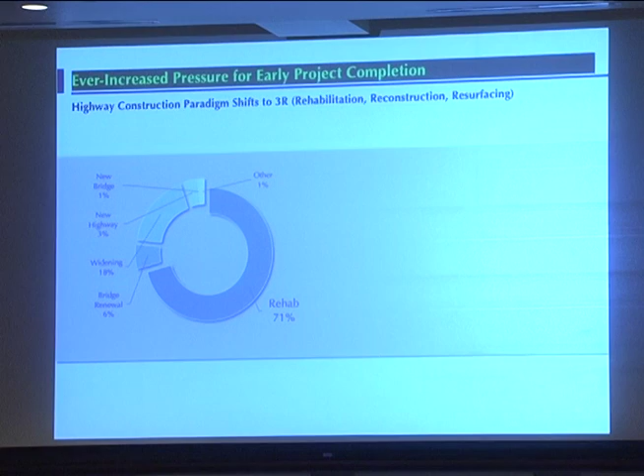For my research purpose, I collected and analyzed a fairly large set of high confidence project data, over 6,000 projects from Florida. For the initial data analysis, I carefully classified all 6,000 project data by type of project. 71% of all the 6,000 project data fit into rehab projects, the 3R category: rehab, reconstruction, and resurfacing. New highways and new bridges take only 4%.

Data do not lie. So based on this data analysis, we can conclude the current highway construction paradigm has changed from building new highways and new facilities to 3R: rehabilitating, reconstructing, and resurfacing existing facilities. But however, the main problem is...

30% of such rehab projects are in urban areas like Dallas, Houston, Austin, San Antonio. If you look at what's happening in California, 70% of such 3R projects are located in the heavily populated San Francisco Bay Area and LA metropolitan areas.

This has created urgent dual challenges for us: we've got to close the lane to rebuild aging infrastructure, but at the same time we've got to think about a way to minimize public inconvenience from traffic delays caused by lane closures. So there has been increased pressure to finish the project as early as possible to beat the clock. A+B with incentive/disincentive provisions is one of the ideas to achieve this aim of early project completion.

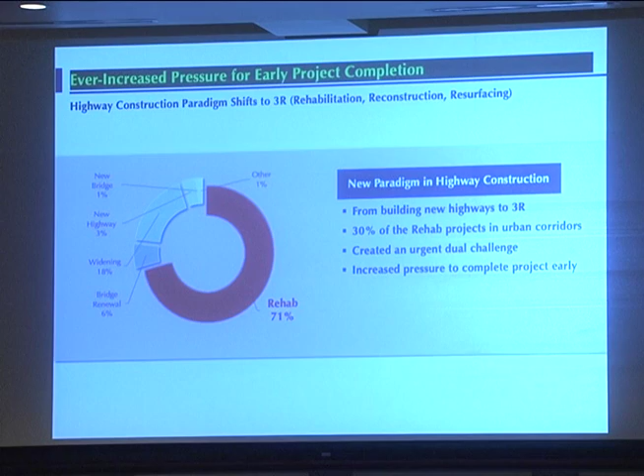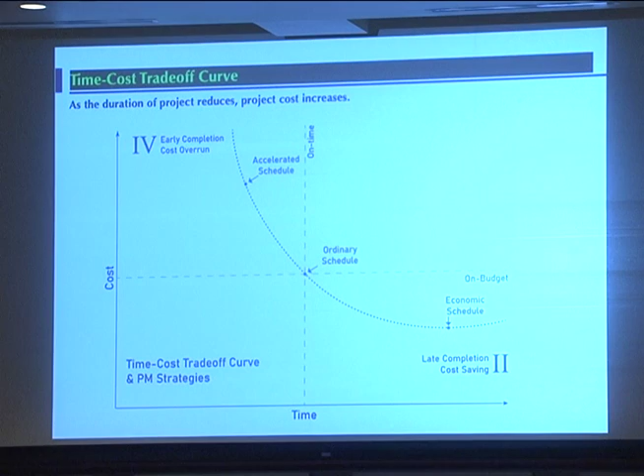So there is a trade-off effect between project schedule and project cost. Based on this time-cost trade-off curve, let me get your attention to the red dot right here at the center point. These are our goal, the goal for any project to achieve on-time and on-budget project delivery. Our goal is moving the curve from here to the bottom left corner, this is our ultimate goal.

Based on this center point, the red dot, we can divide the entire area into 4 different performance blocks. The first performance block is any project that finished behind schedule and over cost, with cost overrun. By the same token, the second block is late completion with cost saving. This first performance block is the worst case scenario. If you look at performance block number 3, this is the best case scenario, which means any project in this block finished ahead of schedule with cost saving, the best case scenario.

So I selected 1,400 projects that utilize alternative contracting methods, just like A+B, incentive/disincentive, no excuse bonus, lump sum, and design-bid-build. By utilizing the key performance indicator I developed, I carefully tracked the individual performance of these 1,400 projects. As you see here for A+B, can you match the color? There is a heavy population for A+B. If you look at the green, which represents the ID projects, most of them are heavily spotted in performance block number 3. So let me give you a number.

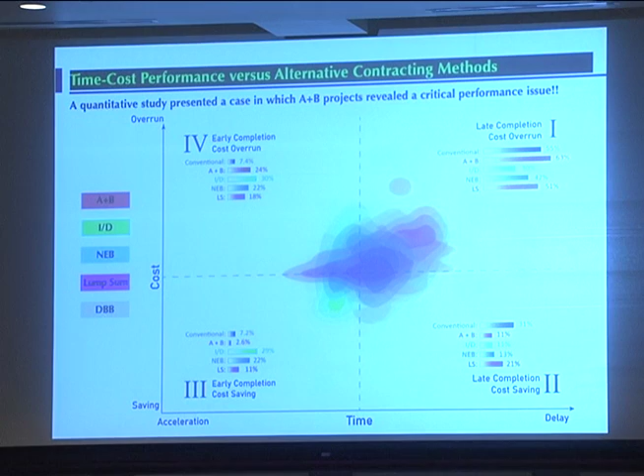Let's look at this. As you know very well, A+B project is commonly used together with ID provisions. For Florida, 100% of A+B projects are used together with ID provisions. It's very common. In this A+B ID contracting, the bidding mechanism, the winning bidder is the one who turns in the lowest combined bid for the A cost and B for the time.

That's why the determination of contract time, the user delay cost, which is the B value of A+B, is extremely important. Let me show you some worst practice example.

Let's look at this. This is a part of the Interstate 580, which is called the MacArthur Maze. This is the East Bay, home of 7 million people. This is one of the major commuting routes heading to the Bay Bridge to San Francisco.

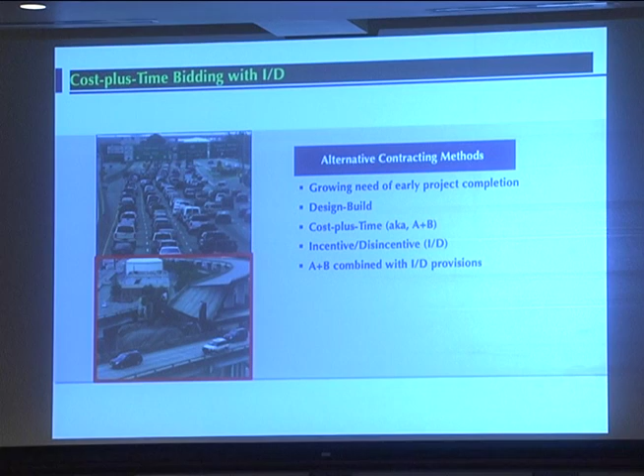Let me tell you more about this project. A truck driver, look at this, around 4 o'clock a.m., the truck driver just fell asleep. Then he lost control. A fully loaded gasoline tank truck turned over. Because of the fire, this small portion of an important bridge just collapsed.

So what does that mean? 7 million people living in the East Bay Area, including myself. Around that time, I lived in that area, just 5 miles away from this bridge, for my PhD study. The bridge collapsed, so 7 million people had an immediate strong impact. For that reason, this project got extremely high attention from the media, the traveling public, and the government.

For that reason, Caltrans decided to use the A+B ID bidding mechanism. For the B portion, Caltrans estimated 50 days with a record-breaking daily incentive amount of $200,000 each day, with $5 million as the maximum incentive bonus.

The winning bidder was less than $1 million. In the end, the contractor was able to finish the entire project within 25 days, and of course he got the maximum incentive dollar amount of $5 million.

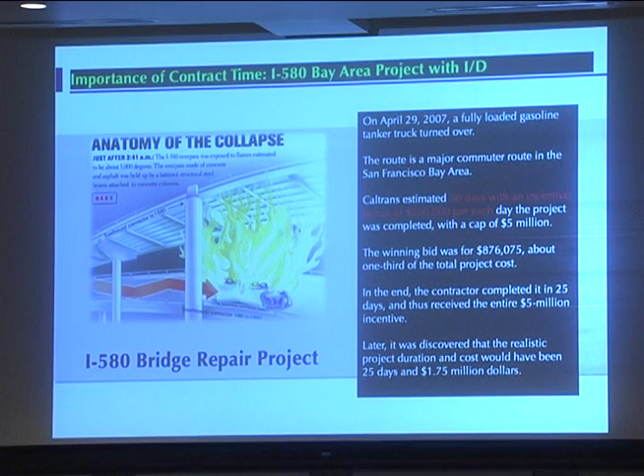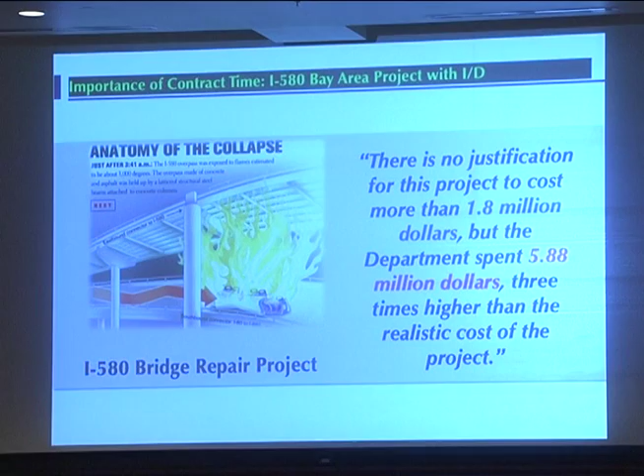Here's the conclusion from this project. There is no justification for this project to cost more than $1.8 million, but the agency spent $5.88 million, 3 times higher than the realistic cost of the project. This was a worst practice. The example clearly demonstrates the importance of contract time determination and user delay cost determination.

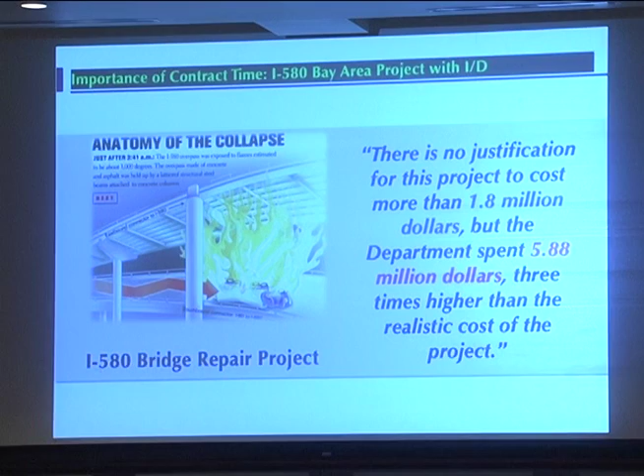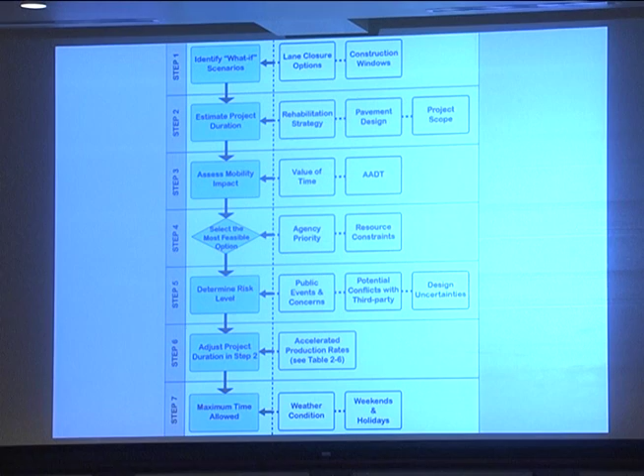Learning from this worst practice example, I have developed a 7-step procedure, which looks like this, to come up with the most realistic contract times and user delay cost for A+B projects. I was lucky to apply this new concept to 5 different Texas urban A+B ID projects.

In the next slide, we're going to briefly go over each of the steps, just briefly, because time is limited to 20 minutes. This 7-step procedure begins with the identification of potential what-if scenarios.

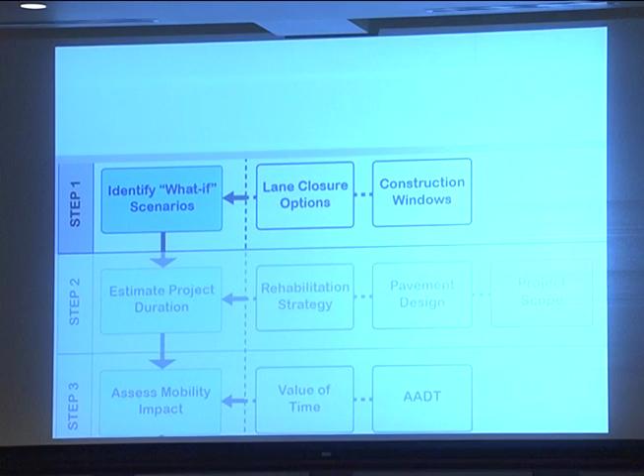The options can be defined with respect to duration and occurrence, such as nighttime, weekday, weekend, and 24/7. Each option can be planned under 3 standard traffic control options, such as single lane closure, double lane closure, and full lane closure, with some variations.

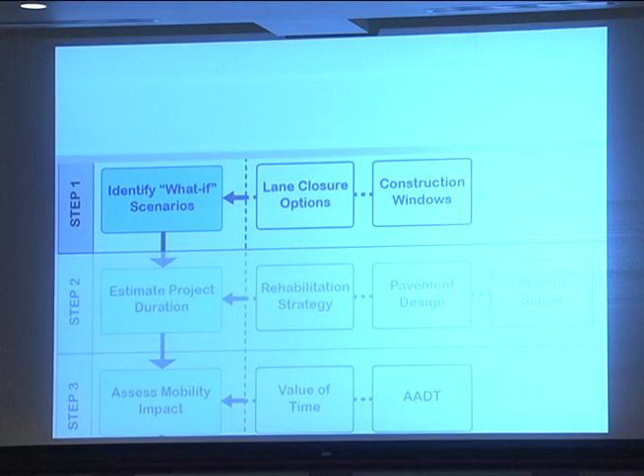The second step is about PDE, project duration estimate. The effect each individual what-if scenario has on project duration is estimated in this step by considering rehab strategies, pavement cross-section design. For example, for rigid pavement, it could be an 8-inch traditional conventional pavement cross-section design, or a long-lasting pavement design, 12 inches on top of an 8-inch cement treated base, and project scope.

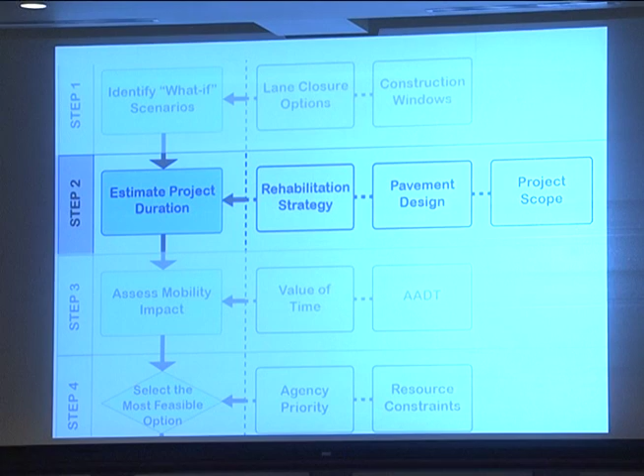Then step number 3: in this step we need to assess and evaluate the work zone traffic delay impact by considering various factors, such as value of traveler's time - $22 for passenger vehicles, about $37 for trucks, according to the 2015 TTI report. Then 24-hour traffic count, AADT from the Texas Lone Star database, and traffic lane configuration during lane closures, capacity adjustment based on the Highway Capacity Manual, the length of closure, lane width, number of lanes, percentage of trucks, etc.

At this point, we are getting 3 important decision-making data points: project schedule, user delay cost, and traffic delay.

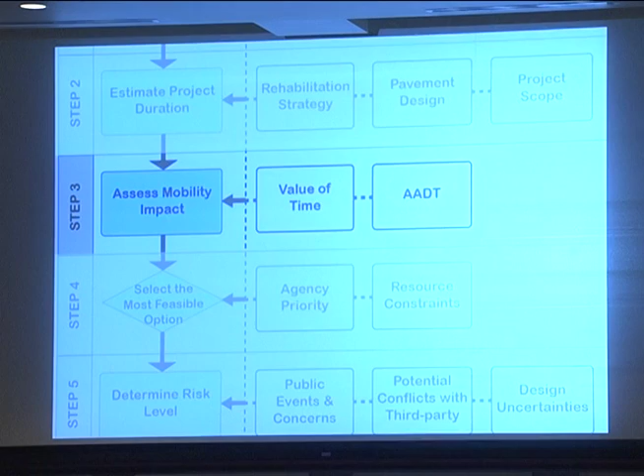Next, step number 4 is to select the most feasible option out of the 3 or 5 options, mainly based on the contracting agency's priority. If the agency's top priority is to beat the clock and focus on schedule and project duration, select the fastest option. If the agency wants to strike a balance between project duration, user delay cost, and level of traffic inconvenience to the traveling public, select the one accordingly.

Then for the selected final option, check all the potential risks, such as public events. Will there be a football game, for example, around September? Are there any public concerns? Also check any potential conflicts, such as right of way or utilities.

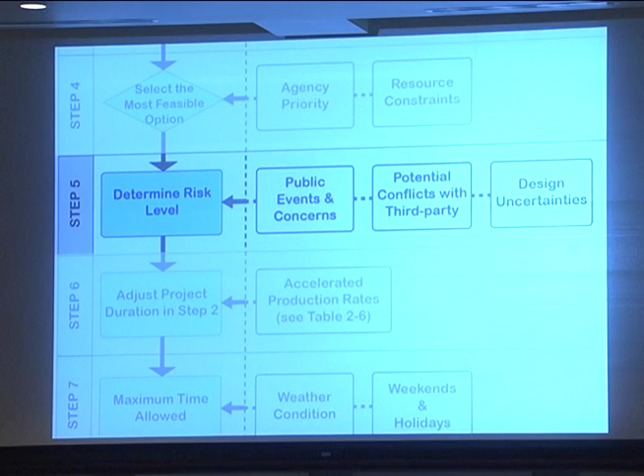Then step number 6, we probably need to adjust the initially estimated duration of the project for the finally selected candidate by applying accelerated production rate. So it is quite reasonable to expect that for A+B incentive projects, the contractor needs to make additional commitment, using 15 to 20% more resources for construction acceleration. This is, I believe, a quite reasonable expectation.

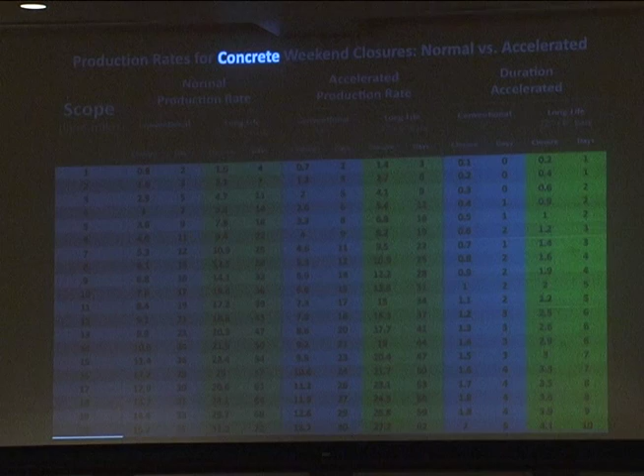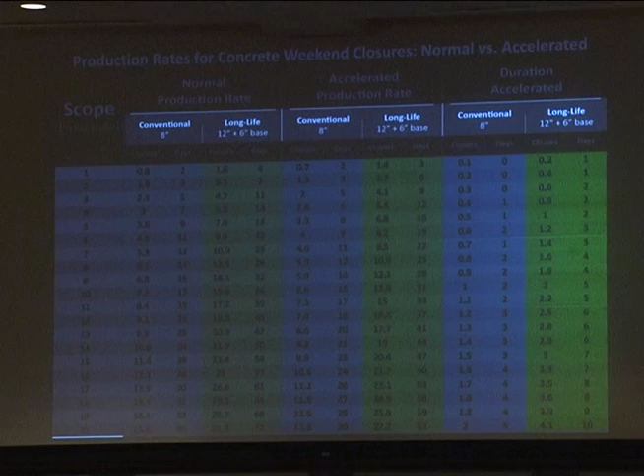When I developed these lookup tables for the accelerated production rate, I considered all the important factors, such as the type of rehab strategies - it may be concrete, hot mix asphalt, milling and AC, operator mobilization, and so on. Then the scope of the project, pavement design, then the duration and occurrence of lane closures - it may be weekend, weekday, 24/7, or nighttime. Then production rate.

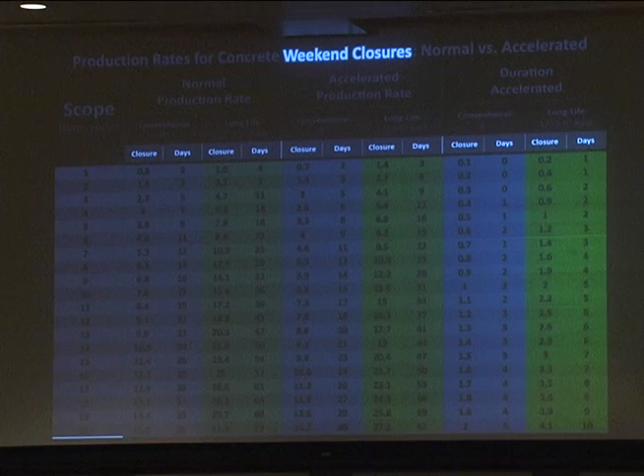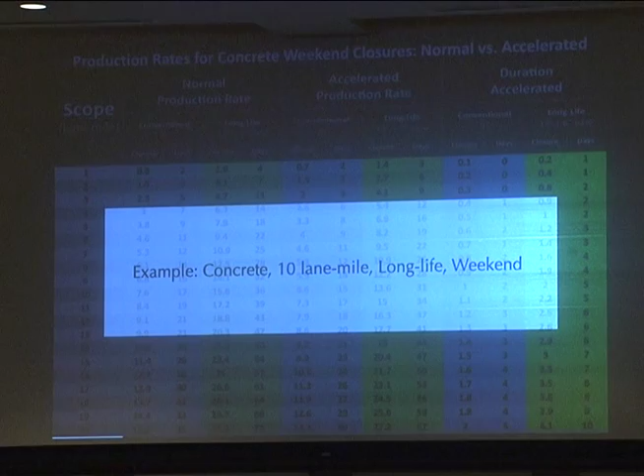So for example, let me give you an example. We're going to use the concrete CRCP rehab strategy to rebuild 10 lane miles of badly damaged highway using a long life cross-section design during a 55-hour weekend. For the concrete, select the concrete, then the scope of the project, then the pavement design - we're going to use a long life pavement design. Then weekend closure, select the table.

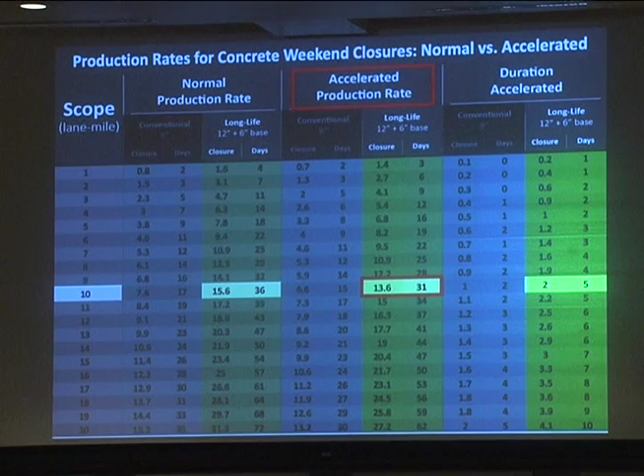Under the normal production rate, the table says it will take about 15.6 times of lane closures, needing 36 working days. After applying the accelerated production rate, the project can be finished within 13.6 lane times of lane closures, within 31 working days. So these are the savings.

Okay, so the last step is to convert the number of working days into the number of calendar days, considering the weather, weekends, holidays, and any non-working days using the Texas spec manual.

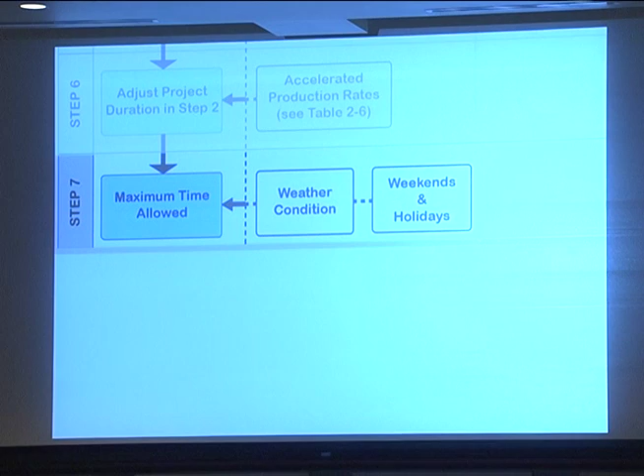As I said, I was lucky to apply this new concept, the 7-step CTD contract time determination procedure, to 5 different TxDOT projects. I just picked this project as a best practice example: the IH-20 Dallas project. The project scope is 6 centerline miles with 3 lanes for both directions.

So 6 times 3 is 18, 18 times 2 is 36 - that is the project scope, full-depth, 13-inch CPCD. Then the work zone has about 55,000 AADT. One unique thing about this project is the work zone has a very, very high truck percentage - 27%.

Then the agency wants to use A+B+I/D. The agency set up $4,000 as the daily incentive/disincentive bonus amount for 270 days. So the agency's estimate is 207... 270 days.

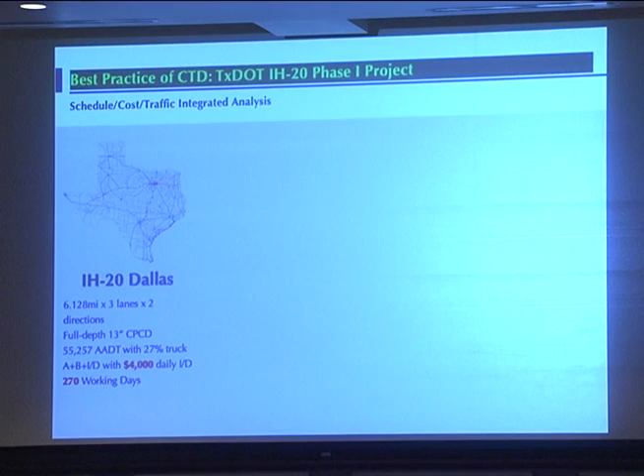Okay, then step number 1: in a pre-construction meeting, I asked the project team, 'What do you want to explore?' They said, 'We want to explore these 2 things: weekday and nighttime.'

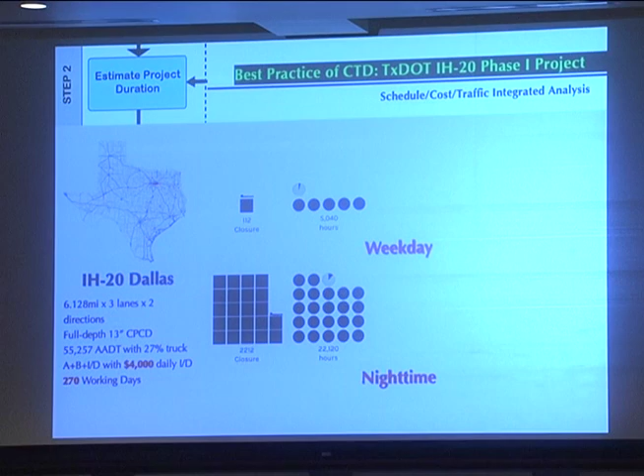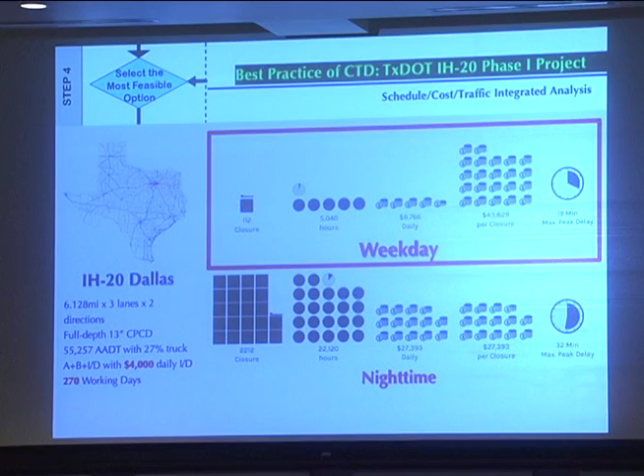Then step number 4, we checked all the potential options and selected the weekday as the final candidate. It was a very easy decision because weekday just stood out in all 3 evaluation criteria.

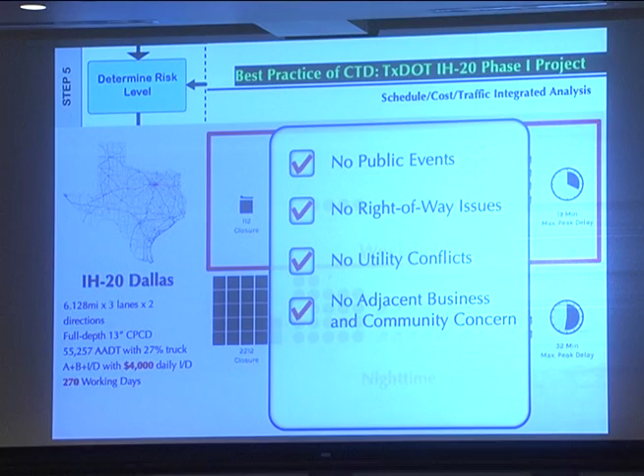Then step number 5, we checked all the potential risks. We adjusted the duration by applying the production rate lookup tables.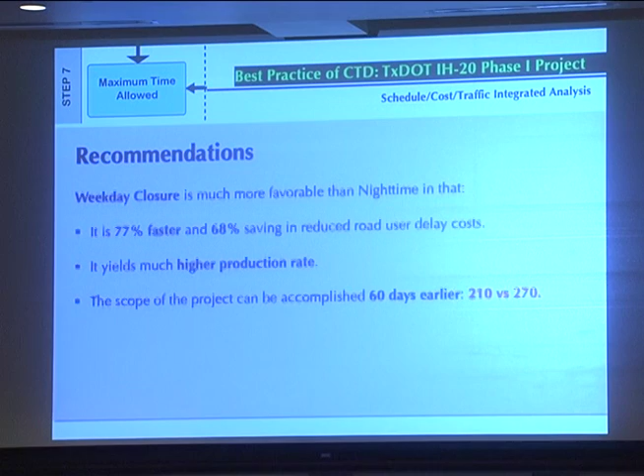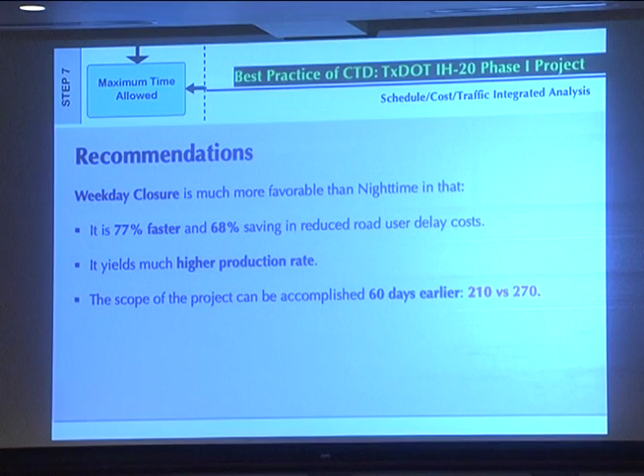Here are our recommendations for the contracting agency: we believe the 270-day estimate by the contracting agency is an overestimate, so we recommend 210 days instead of 270 days.

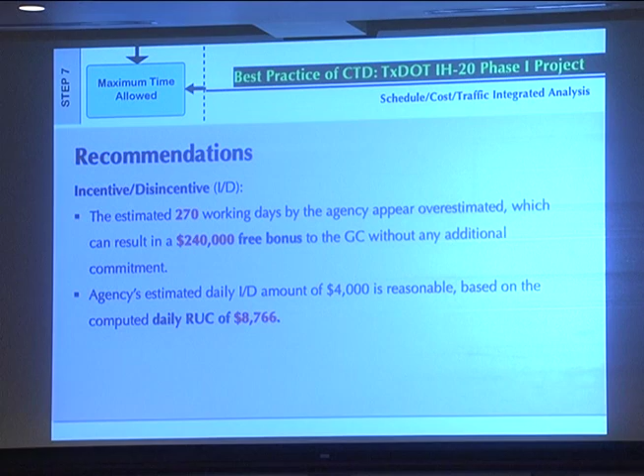If the agency just sticks with the 270 working days, what does that mean? This will result in almost $240,000 free bonus to the general contractor - the contractor will get it for free without making any additional commitment.

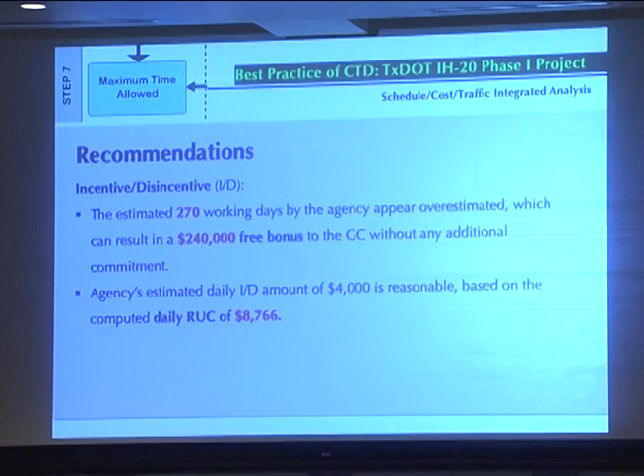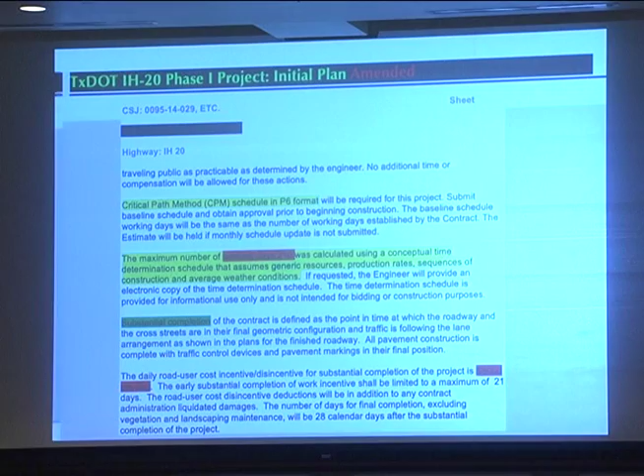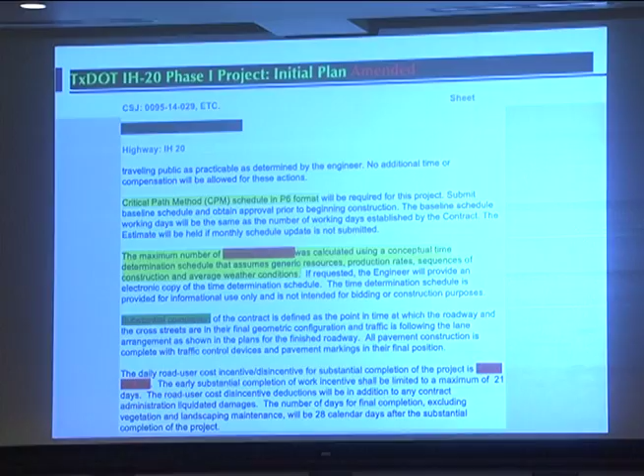Then based on the estimated daily road user cost, we recommended $8,000 to be the daily incentive/disincentive amount. The agency listened to our recommendation - they changed the number of working days to 210 days from 270 days, and the daily incentive to $8,000 to better motivate the contractor for the project.